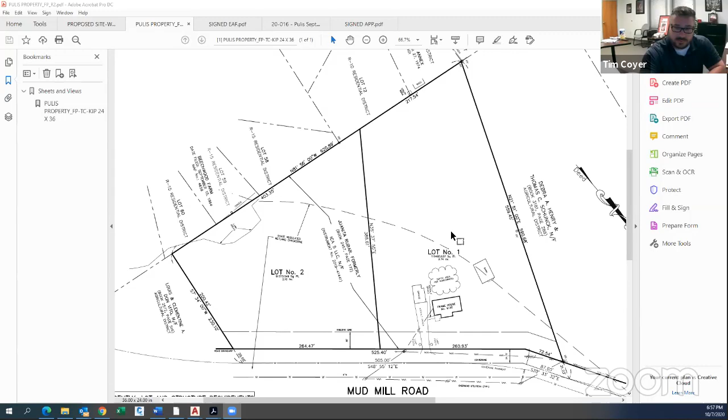So, as I was saying, it's a 4.8 acre parcel. There's an existing house on the west side of the property. They're looking to carve off this lot 2 here. It's roughly 2 acres that they're carving off. The remainder is going to be 2.7. They're going to probably sell it off or build a house on it. Thank you, Tim. We'll go through and see if there's any questions at this point. Mr. Aceto? No. Mr. Abbey? All set. Mr. Snyder.

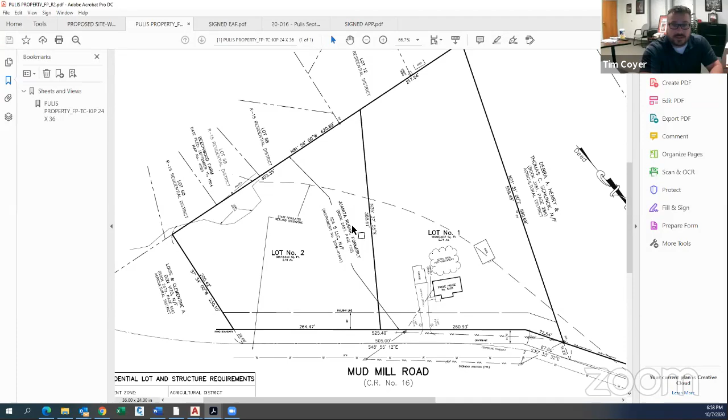Mr. Snyder, we cannot hear you. I'm just wondering, is all of this, it looks like it's all wetland? No, basically according to the deed, it's a wetland check zone. So in theory, there could possibly be wetlands out there. So before they go building, they have to make sure they take a look at any possibly on the site. So the check zone has to prove that it's not going to be wetland? Right. Okay. Thank you, Mr. Bloss. No questions at this time.

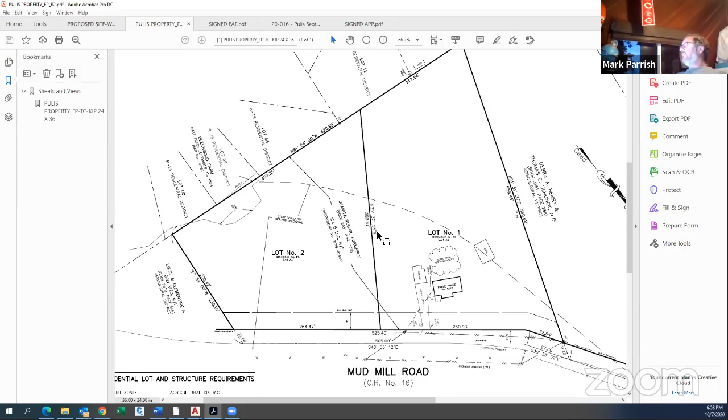Mr. Marzullo? No questions. Mr. Parrish, have you got anything right now? I guess the only thing would be to have some sort of look at the wetlands be completed. I just want to look at the plan a little. Lot area. Tim, does the wetland map show any wetlands in the area? They're across the street. Across the street? Okay. All right. We'll be putting together some comments. I'll look at the situation here, and if there's a need for further investigation, I'll put those into the comments that are submitted. Thank you, Mark.

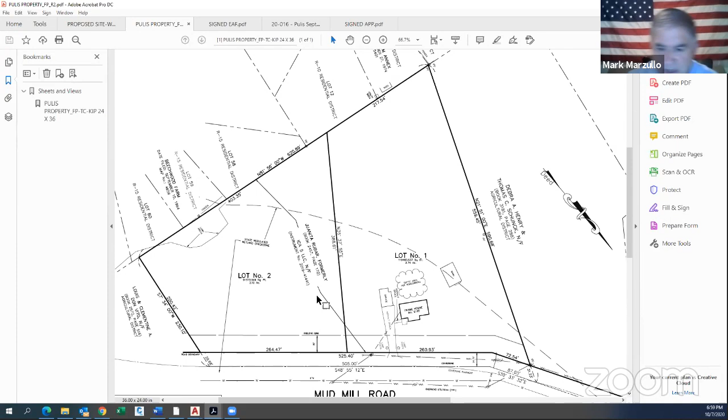Mr. Jermaine, anything at this point? No. Mr. Procopio? Yeah, and Mark will probably pick up on this in his review letter, but I noticed it showed a typical sewer connection detail on the map, and there's not really any sewer availability. Oh, did you take it off? I took it off. Okay, we had it on there before. Yeah, I took it off. Good catch.

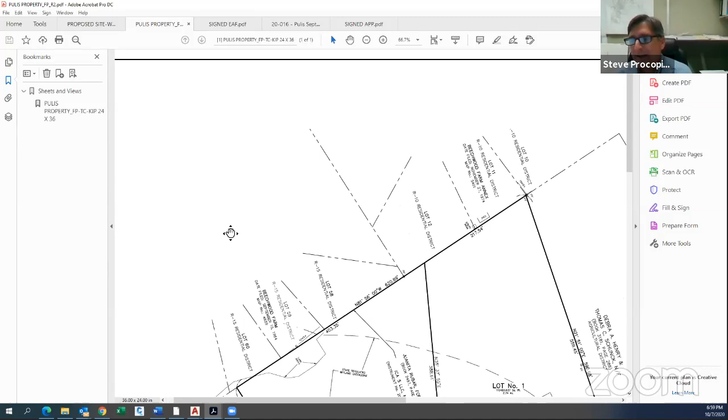All right, Neil, would you make a motion for the public hearing scheduling, please? Yes, move for the adoption of a resolution calling for a public hearing on the matter known as minor subdivision preliminary and final plan, ICA 5 LLC, Pulis Property Subdivision, 6126 Mud Mill Road, 2 lots. The public hearing shall commence at 6:40 or soon thereafter, as the matter may be heard, at a regularly scheduled meeting of the planning board on Wednesday, October 21st, 2020.

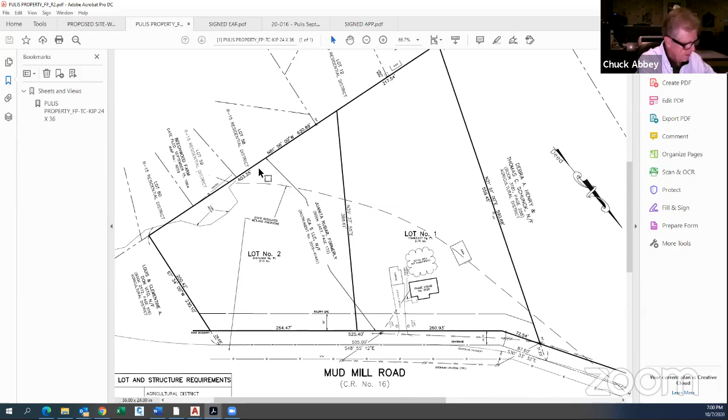And that's an affirmative motion. Do we have a second? Second. Mr. Rosito, yes. Mr. Abbey, yes. Mr. Snyder, yes. Mr. Bloss, yes. And I vote yes. Motion passes. Thank you, Tim. Thank you very much. Mike, can you take the map off, please?

Thank you. Next item on the agenda is Milton Real Properties of Massachusetts. This is for the property at 7285, 7309 Eastman Road. It's a proposed Caterpillar sales and service area.

Gentlemen, welcome back. Well, thanks, Mr. Chairman. We appreciate that. Seems like it's been a long time. It has been a while. Yes. But onward, forward, right? Exactly. But we're still here and we're still going strong. Beautiful. Good to hear.

So you want to go through the list that you received from Mark Parrish, your answers to those? Yeah, I have on the call with us Adam Thibodeau and Lee Allen with Colby Company Engineering. They've been working with Mr. Parrish and the folks going through those things. I just wanted to say good evening and thanks, we're still plugging and we're going to see this thing through. Good to hear. Adam and Lee, please take over. Great, thank you, Brad. Welcome.

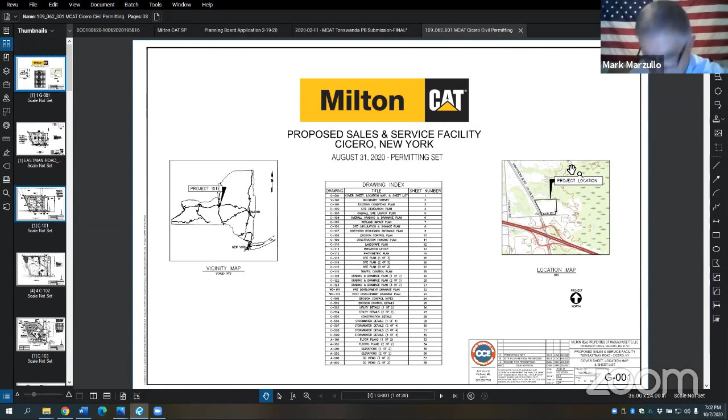Mr. Chairman, can we have the ability to share our screen? We can do that. Adam Thibodeau, please. Beautiful. Thank you, Michael. Let's go. Are you able to see what's on our screen? Are you seeing the plan on your screen? Seeing page 1. Okay, perfect, the index.

Okay, I'll start. Thank you, Mr. Chairman. My name is Lee Allen with Colby Company Engineering. Here to respond to some of the comments that were raised most recently by the North Syracuse Volunteer Fire Department. I talked at length with Deputy Chief Linnertz last week, and apparently the changes we made didn't get back to him by the time he wrote this letter.

But we had talked about providing 26 feet of clearance around the building, and we have 26 feet here now. The canopies we have pushed back in this area. So this canopy has a little jog to get clearance here. And these aisles have been enlarged to 26 feet so that he, in fact, has 26 feet all the way around the building.

In addition, we had gotten results of a flow test of the hydrant that's located out here in Eastman Road. The results had 900 GPM residual. We need roughly 1,500 GPM, so we have added a fire pump house and a storage tank to meet the firefighting water demands for this building.

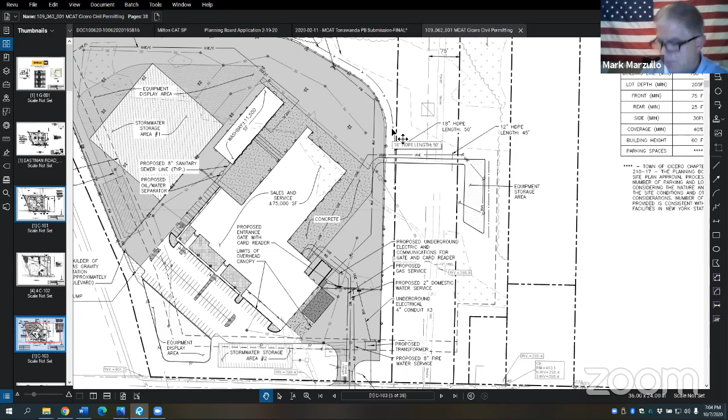Mr. Parrish had, we've talked at length as we've gone through this process several times. He had some comments. Number one had to do with stormwater, and at the end of the day, necessity for Milton Cat and the town to enter into a stormwater maintenance agreement. We agree that's pretty standard these days.

Number 2 talks about our site driveway out onto Northern Boulevard, which is right in this area. We have received a tentative agreement from the DOT that they've approved this entrance, pending board action to move this forward and allow Mr. Procopio to sign off on that.

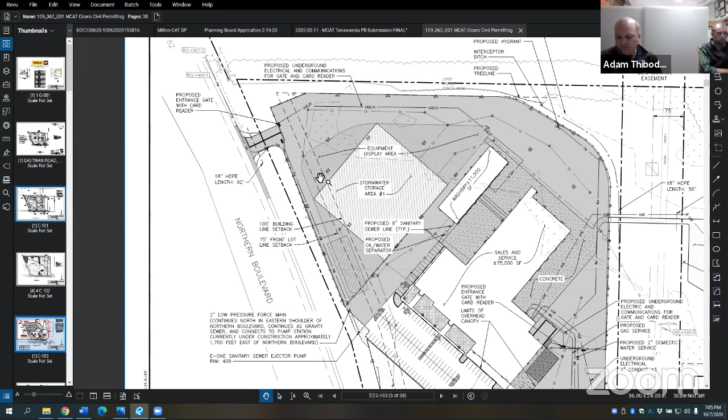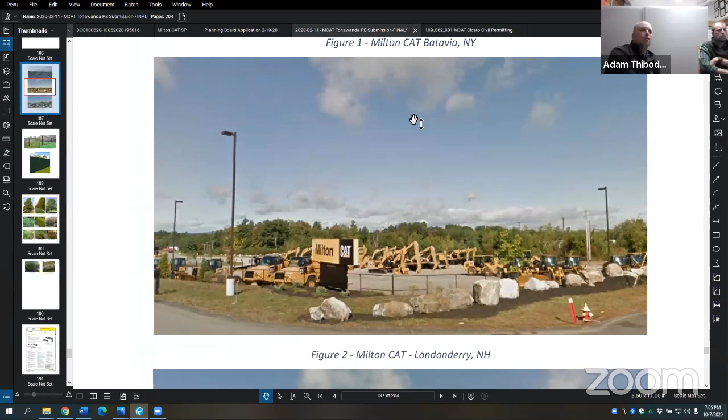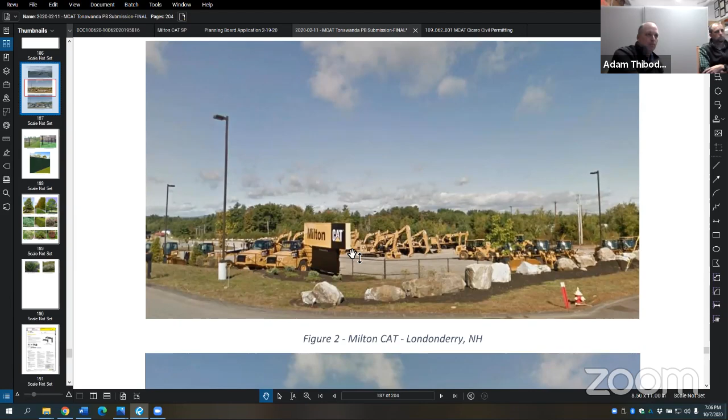The other question had to do with what types of equipment are stored outside of a facility like this. So we have some pictures from other sites just to share with you. This is a site in Londonderry, New Hampshire. You're looking at excavators, loaders, that sort of machinery. It's out in front. Here's another view. This is very typical for all the Milton Cat facilities in the Northeast.

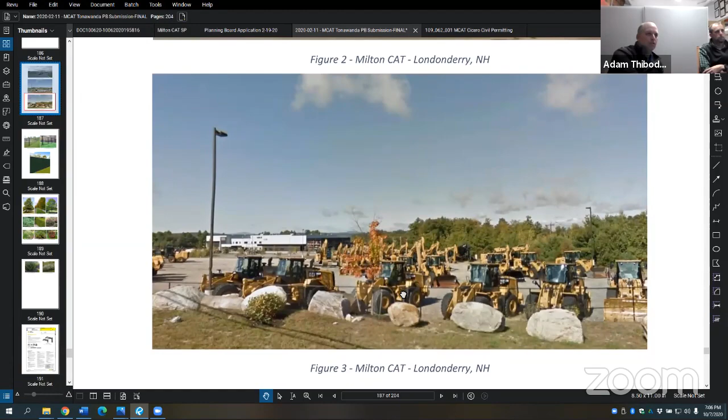Those are all for sale. I bet they are. I like that.

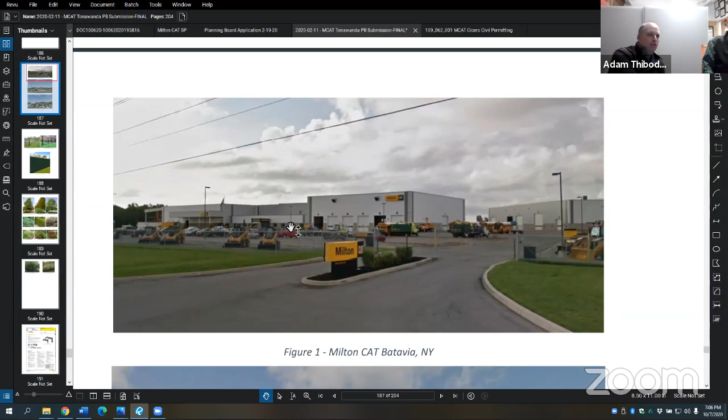Here's a picture of the front of the Batavia, New York facility. As you can see, it's that type of yellow Caterpillar excavator, loader, dump truck, skid steers. That sort of equipment will be located in the front of this building as well.

One of the things we've worked at length with the town on is the off-site sewer. We don't have soils acceptable for septic. So we've worked with the town engineer, Ms. Fiorello, and come up with a plan. That should be on the screen now.

So our site is shaded here in red. We're proposing a force main up the side of Northern Boulevard to a point where gravity can take over and then run gravity past the next 2 properties and then turn back east and tie into a pump station that will be constructed as part of this project. So that's our ultimate plan, how we're going to deal with sewer. Just wanted to share with you that's what we're thinking, and we've talked with Mr. Procopio, Mr. Parrish, and Ms. Fiorello about this path moving forward.

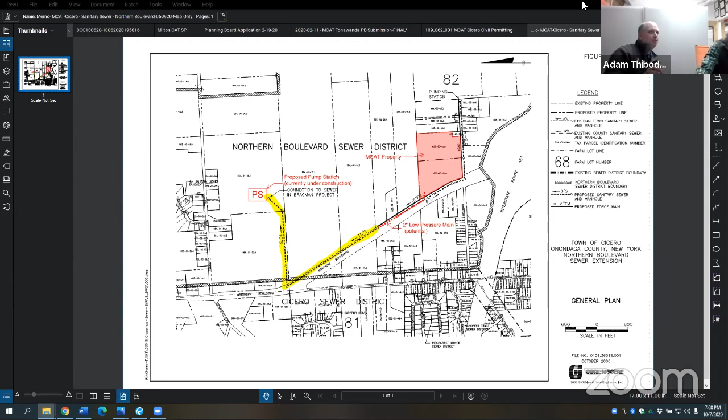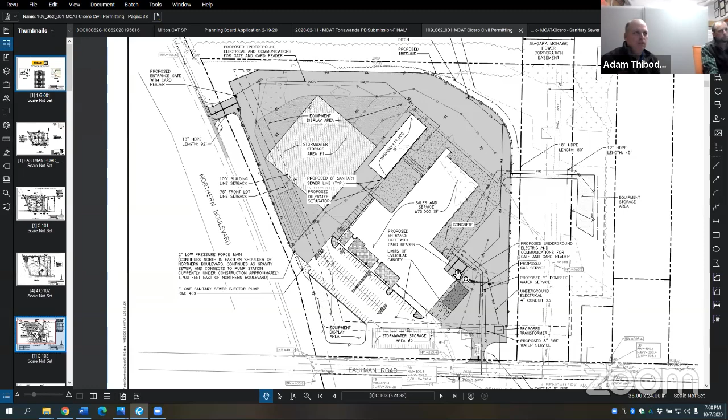Go back to the site plan. Fourth comment has to do with coordination with the water district. Adequate fire protection, as we mentioned earlier, we've got underground storage here with a fire pump house here. Further noting that we will have installed backflow preventers to ensure that we're not contaminating back into the system. That's a note that we've added to the plan and we'll make sure is part of the building permit package when they get submitted.

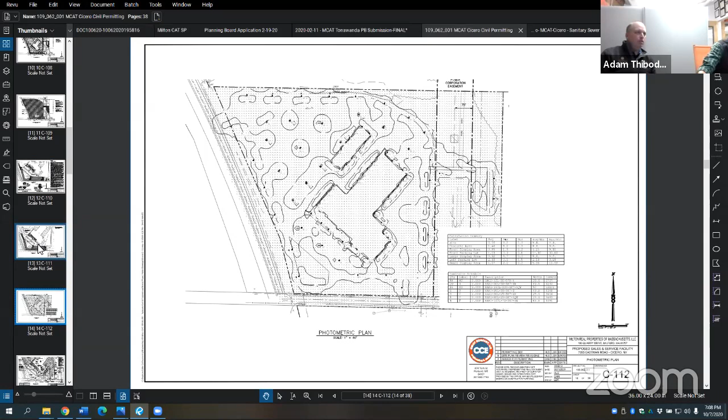What's particular to note is, based on our stormwater calculations, this area of grass is very integral to the stormwater system, as a lot of the runoff, mostly from the roof of the building, is going to be stored, and then we're going to use that as irrigation to sprinkle this area of grass and supply water for these plants during the growing season. That's an LID method that is allowed by the state. We've reviewed it with Mr. Parrish, and he has agreed that we do in fact meet the intent of the DEC rules.

As far as signage goes, we have building signage, and I'll let Adam get to that when we talk about the building, but there is one sign out front.

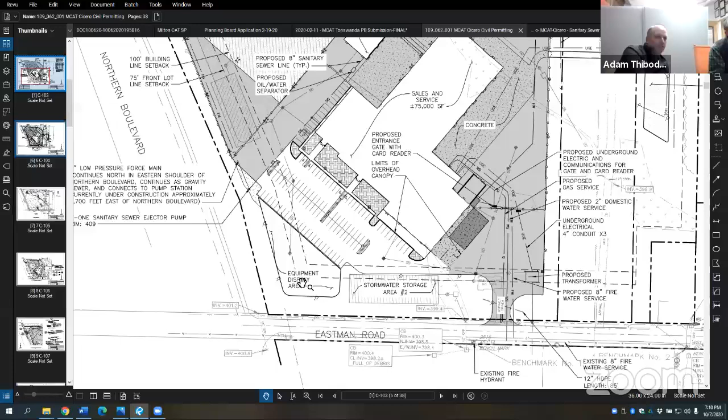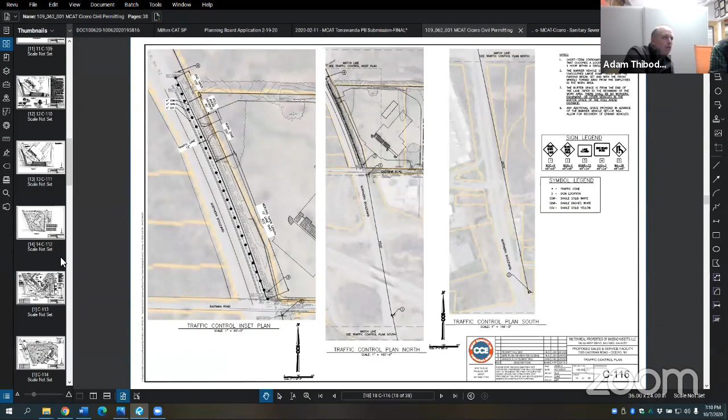Anyway, the sign is located in the front in this general area. And I'm sure it shows up on another sheet. I just don't have it at my fingertips. Anyway, I know it's out there. Take your time.

The items that Mr. Parrish brought up, lighting, he thought that was reasonable. We can certainly get into detail if you have questions on that. Further, simple subdivision, this parcel consists of 2 lots. We would work with a land surveyor to produce a plan that would merge those lots and be part of ultimately what is an approval, we hope.

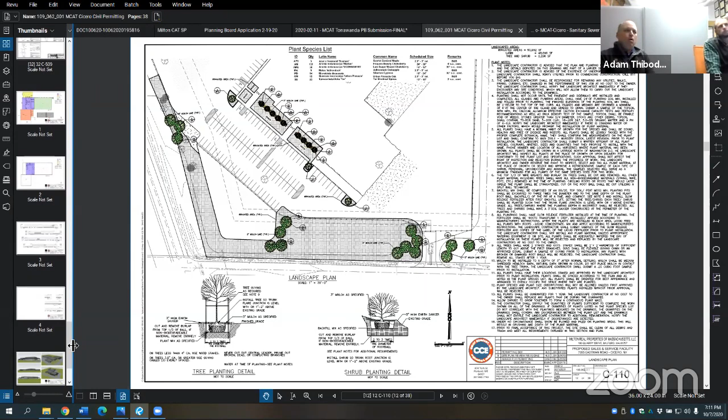Number 6 talks about the wetland permit. I think when we were before you in February, we still had work on the permit. We in fact received the permit for wetlands from the Army Corps and the DEC in July of this past year. Do you want to get into the building architecture? Adam's going to go briefly through the building elevations, just point out.

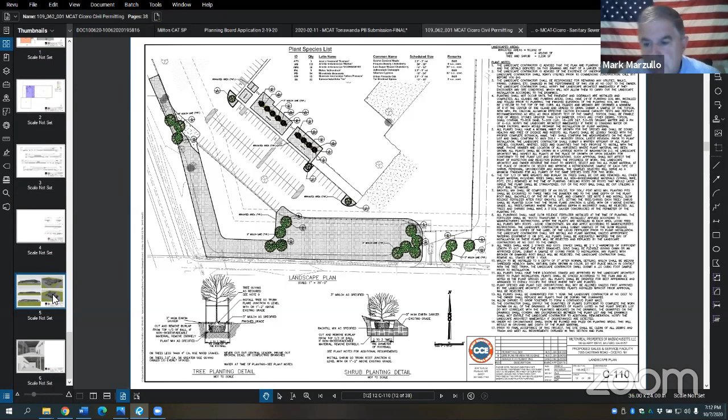Okay, thank you. It was the opinion of the board for us to go through some of the building elements themselves. So I'm happy to walk you through some of those items. I'll take you to the building rendering. I think it's probably most representative. The top left corner... Excuse me, 1 second. It's kind of hard to hear you. I'm sorry. Looking at the front facade of the facility.

Much better, thank you. So Milton Cat typically constructs their facilities using a pre-engineered metal building type structure. And so they're typically clad in metal for the top portion of the building with a portion of block that runs along the perimeter, along the grade level, up to about 8 feet in height. Right now we're showing approximately 8 feet with a band of split face block running through the middle there.

Roofs are typically constructed either of EPDM rubber roof or standing seam metal, depending on the location of the building and what's most advantageous for the site. The front facade of the building, as you see down here, has a lot of curtain wall glass to make it as inviting as possible for the customers coming in. You have your main entry to the facility right here in the middle of that curtain wall. There's also a secondary entrance over here to the left.

That's for the company called SITECH. SITECH does all the instrumentation for Milton Cat equipment, and they have a presence in the Northeast alongside Milton Cat. So they are providing a part of their facility for the SITECH operation as well. On the right-hand side of the front facade, you'll see there's a loading dock. That's for customer parts pickup.

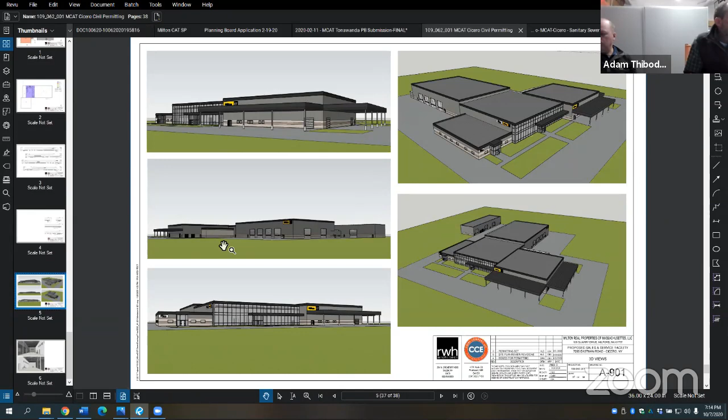We also have a secondary outbuilding consisting of a wash bay for washing the equipment before it goes in for service. It also houses a welding shop for any repairs that need welding. Just to get an overview of the floor plan: again, we have a SITECH space up top here. We have this office and lobby section, which constitutes a 2-story section of the facility. We also have a warehouse space for parts sales, which includes the mechanical and electrical space on the backside. We have a large loading dock for parts drop off by large trucks, and the large service shop out in the back.

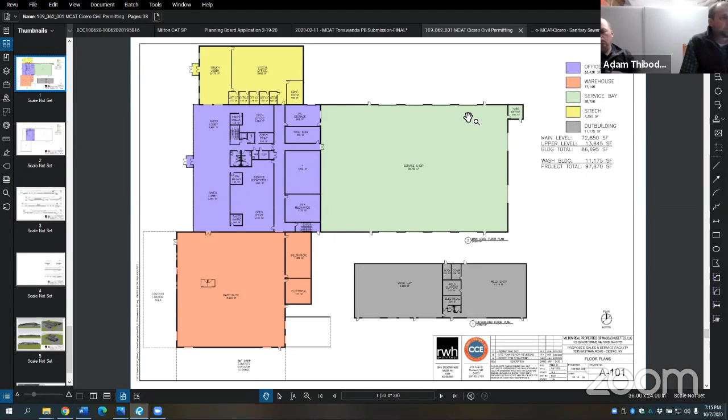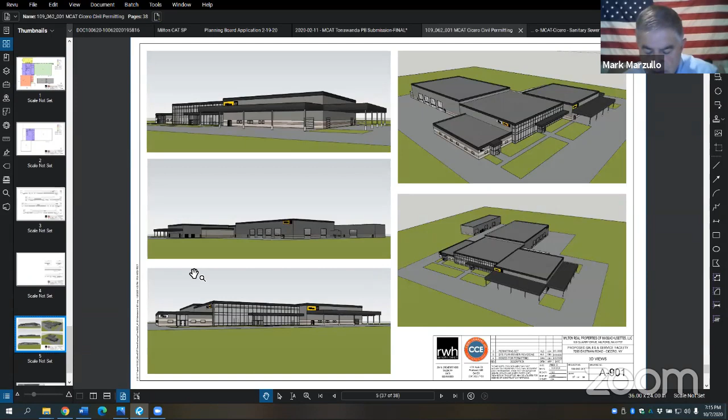I think with that, Mr. Chairman, I'm happy to answer any questions that you might have. Okay, thank you. It's a beautiful facility. The building is just gorgeous. We'll go through the board and see what questions or comments. Mr. Rosito? No questions, but it does look like an awesome facility. I like the landscaping. I think it's going to fit in there very well. Thank you, Joe. Mr. Abbey?

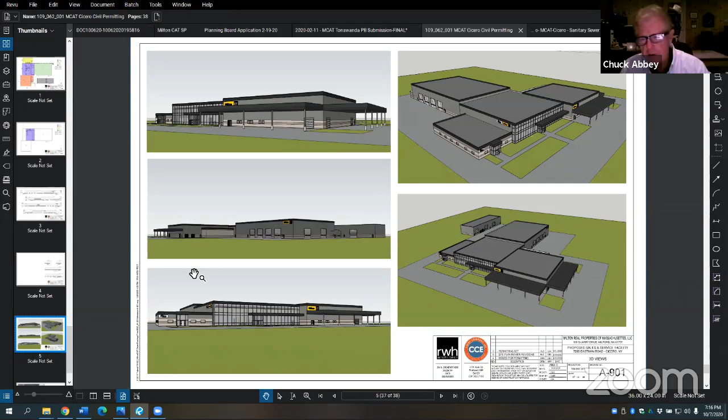Yes, I agree that it's going to be a great addition to our town. My question was about consideration for snow removal, since we do get a bit of snow here. That was on the overall site plan. Hopefully they have the equipment.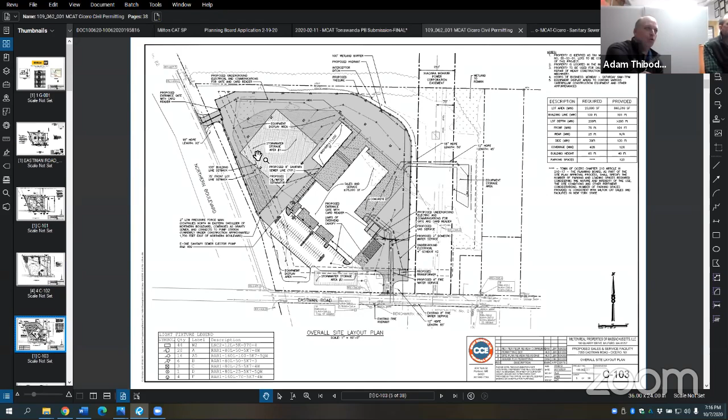Plenty of equipment. We have areas around the site that snow could be stored. There's going to be some equipment storage in this yard. There's area to store snow here. There's area along the front and in this area to also store some snow, as well as this whole edge. Okay, so here. Yeah, looks like you have plenty of room now. Yeah. Great, thank you. Thank you, Chuck.

Mr. Snyder? Yeah, I have a couple of questions. Have I read the drawings right that you're talking about adding about 6.5 feet of fill to most of the areas, since you're at 403 and the building is at 409? That is correct. The soils out here, we have water table very close to the surface. So we needed to add fill to get above that.

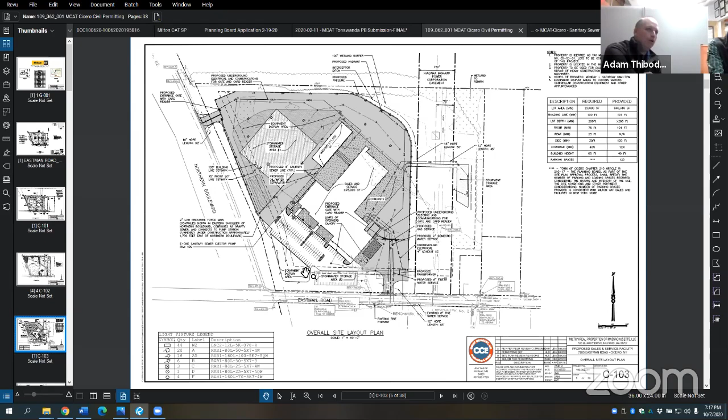We also have some large underground storage areas; this is one of them. There's another one down here. Those are 60-inch diameter pipes. So we're taking some of that storage and we're doing the storage for the stormwater subgrade. So it is a lot of fill, but we are using that space in there for stormwater and storage.

And okay. Will there be a certified paint booth on the site? No, we're not going to do a paint booth at this location. So how do you get the equipment that you welded and stuff? How do you get it painted? For the small stuff, if it's a full equipment thing, a full repaint, we send that off-site. We do the touch-up bombs, the spray cans, which we have the ventilation and the curtain around that, but the technicians do that in their individual bays.

The heat, are you going to use gas-fired devices to heat the facility? Intention is to use gas-fired boilers and also utilize the waste oil that's generated from this equipment and oil changes as a secondary means of fuel source.

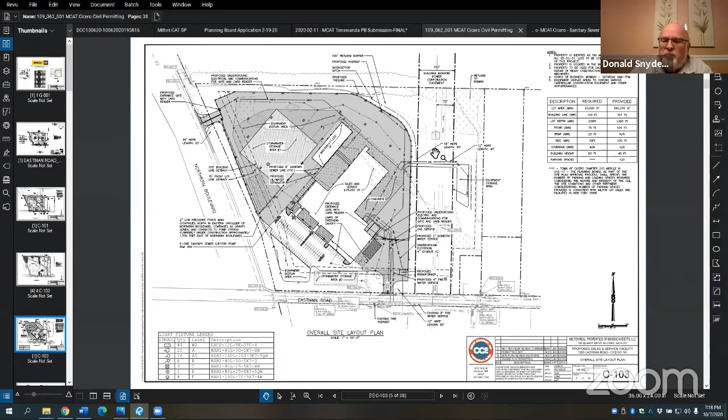All right. The comment that I made, we just built a new town barn, 65,000 square feet. We have a 4-inch gas line feeding that building, and there's some question whether we have enough capacity and pressure. So I thought I read somewhere where you were looking at a 2-inch gas line. I'm not an engineer. I don't pretend to be an engineer, but if that's what you're proposing, I would just ask you to please check that to make sure it's of the right size. Thank you for that heads up. Yeah, absolutely. That's all my comments. Good job. Thank you, Don.

Mr. Bloss? No further questions at this time. Thank you. Mr. Marzullo? No questions. It looks great. Thank you. I just have one question and comment. The display area, typically in the past, the town has restricted equipment display areas from extending the equipment into the air or putting signs on the equipment extended up into the air. I just want to make sure you didn't have any issues with that. Based on the pictures you showed, looks like you would not have an issue with that.

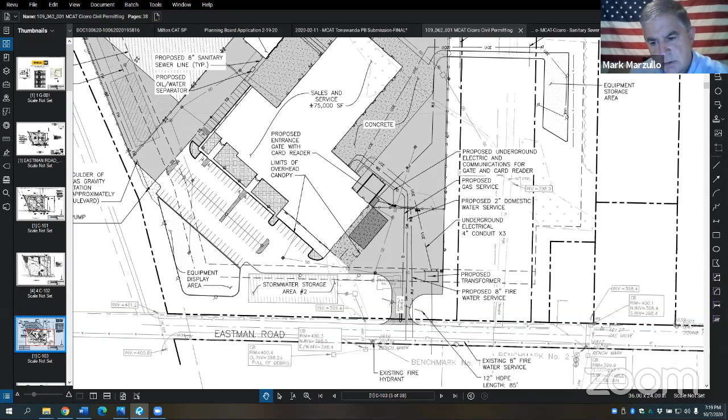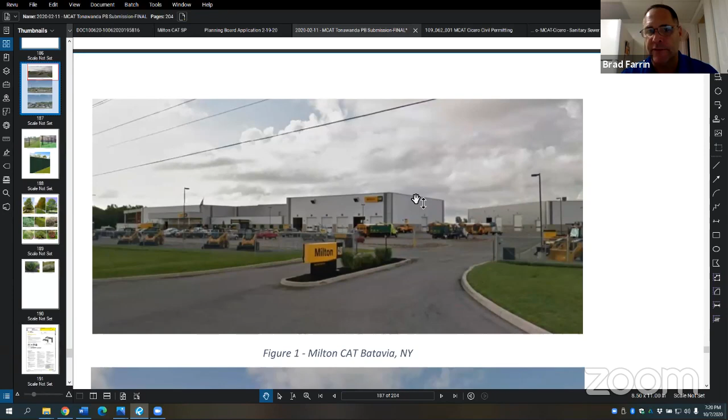We don't use the equipment to display signage. And one of the things that's different since I was in front of you folks almost a year ago, I guess, when we had the first one, is that we also had genie lifts and things of the rental business, and we've broken that business out. We now have a new company called Milton Rents that does the genie lifts and things of that nature. So the equipment, whatever the natural height of the equipment is, we don't do the extender booms and things like that. So that should not be an issue at all. Okay, good, thank you. That's all I have.

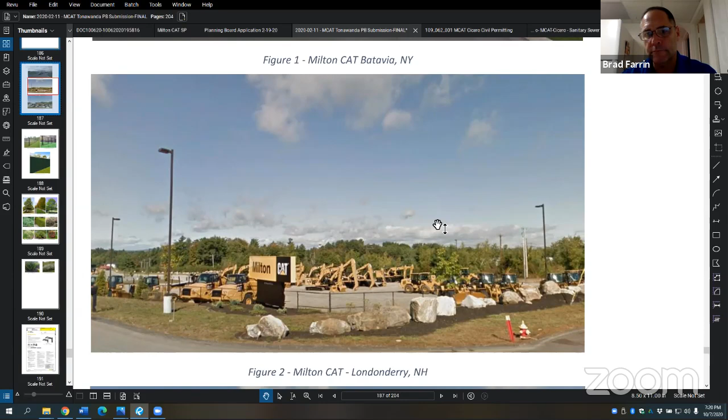Mr. Parrish? No, we don't have anything. I don't have anything to add, other than obviously the sewer is quite a project, so that's going to be critical for them to work with the town to get the sewer extension to the site completed. Thank you. Mr. Jermaine?

Yes, I noticed in Mark's comment, it said that we're going to provide something indicating that National Grid will allow access across their easement. Do you have that? It's in process. I've been working with their right-of-way agent, Pam Espinola, and we're hopeful to get something back from her in the next week or so. Okay. Do you folks have any pull with National Grid? No. That's what we're finding out. Is that it, Neil? That's it. Mr. Procopio?

Just that when they're ready to submit their simple subdivision application, we'll be ready to receive that from them. Okay. So, Neil, it sounds like we're good to move forward with an approval with conditions. Yes. We need a standard SEQR, Joe? Yes, I propose our standard SEQR, and that's in the form of a motion. Do we have a second? Second.